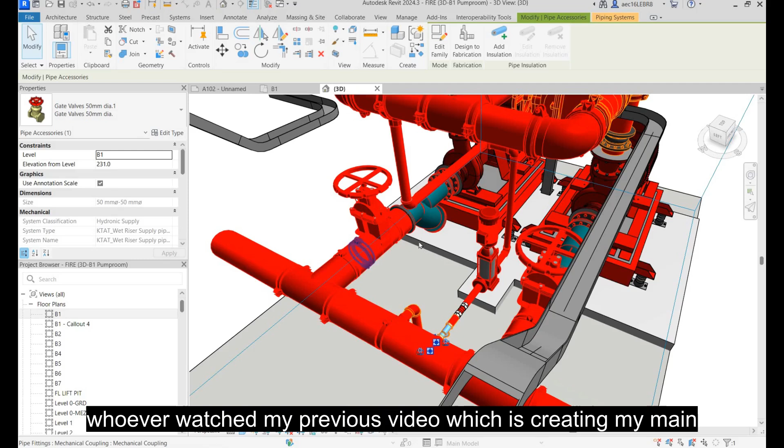So whoever watched my previous video, which is creating the main pump over here, the main sprinkler pump, might be asking what this small pump sitting here is for. What is the purpose of this small pump? Normally we call this a jockey pump.

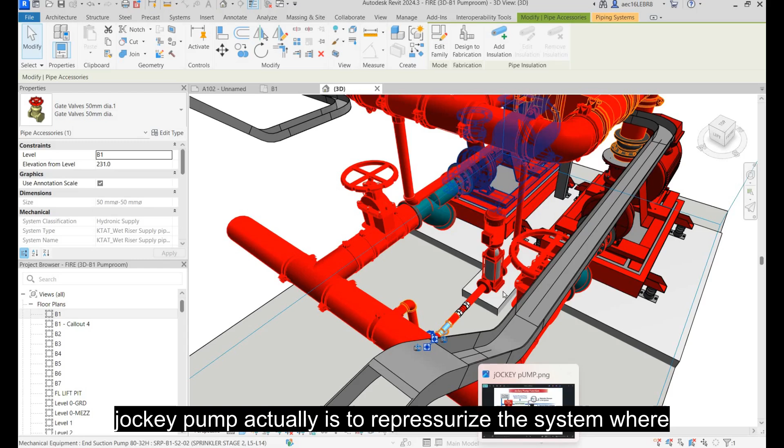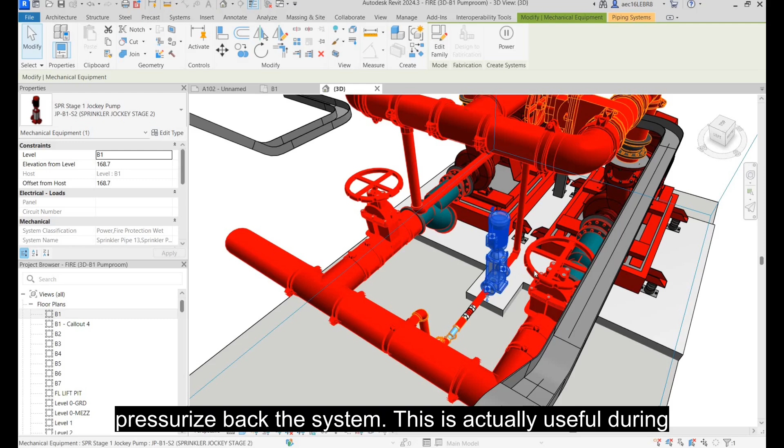The main function of the jockey pump is to repressurize the system where there's a minor leak in the system. Instead of starting the main pump, which creates high pressure in the piping system, we use this small jockey pump to pressurize the system back. This is useful during regular testing of the fire protection system, or if there's any leaking, the jockey pump will run and you will get a notification from your main fire console.

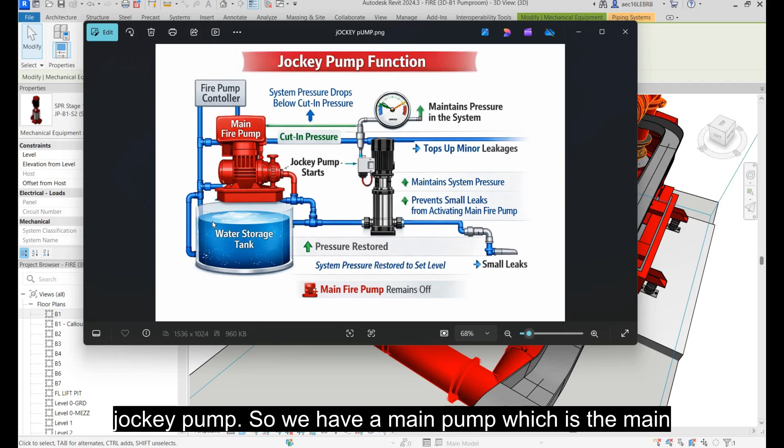This is a simple diagram to explain the function of the jockey pump. We have a main pump, which is the main pumping system of the whole fire protection system, and the jockey pump sits between the standby and duty pump over here. The purpose is to repressurize the system when there's a minor pressure drop.

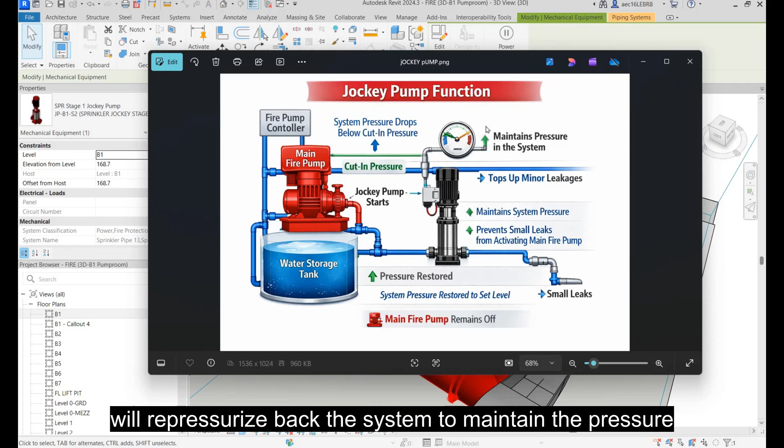In order to test this pump, normally we drain out the water from the system using the small valve here. If the system senses the pressure drop, the jockey pump will start and repressurize the system to maintain the water pressure in the sprinkler system.

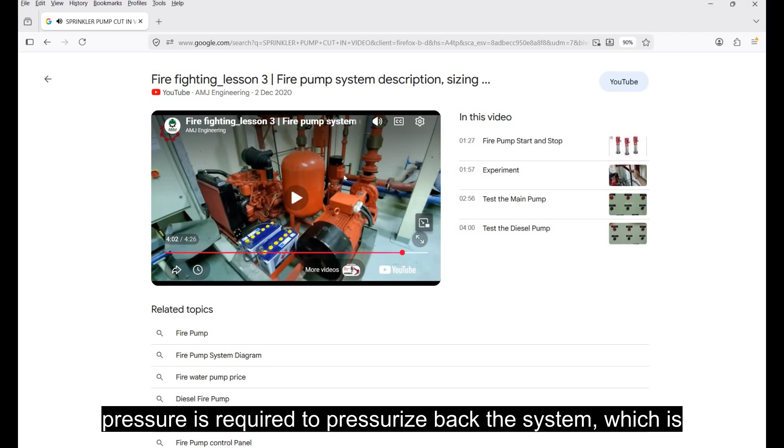So instead of a huge pressure kick, a smaller pressure is required to pressurize the system back, and this job is carried out by the small jockey pump over here. Normally we use a multi-stage pump.

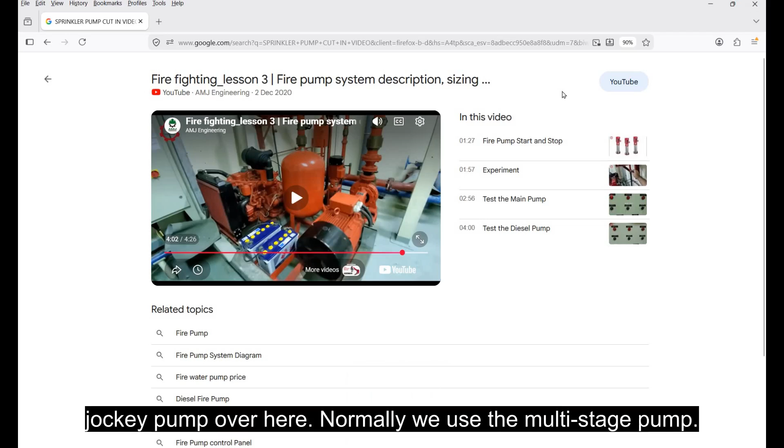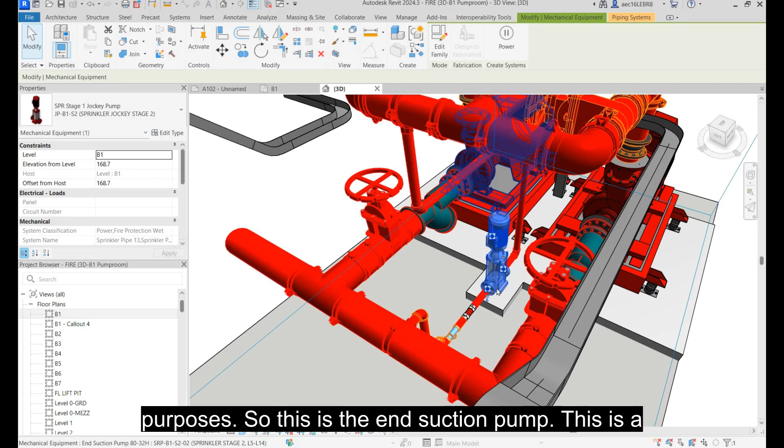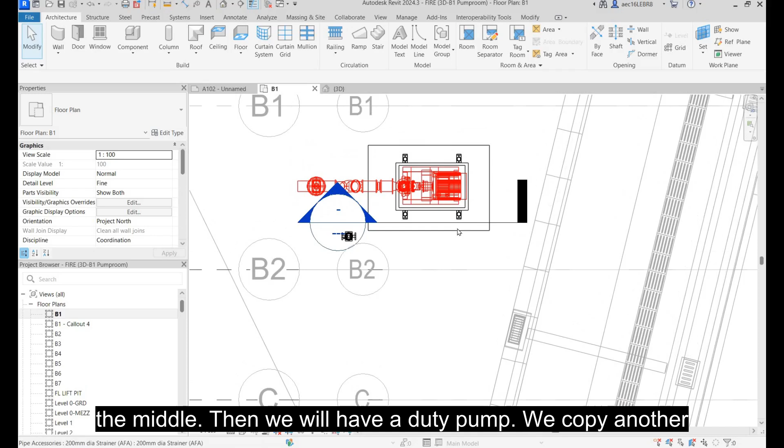Let's see how we're going to model this. We go back to basement 1 over here and place this pump here. We copy this pump since we already have it, and place it in the middle. Then we will have a duty pump, and we copy another standby pump. Talking about fire safety, we always need a duty pump and a standby pump, so in case the duty pump is not running, we still have a standby.

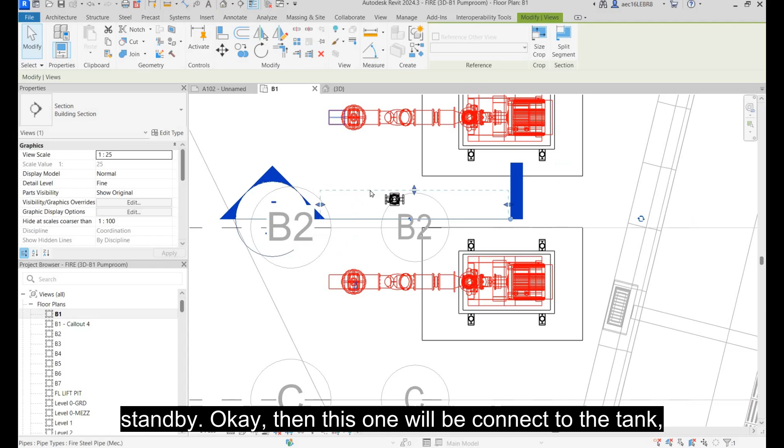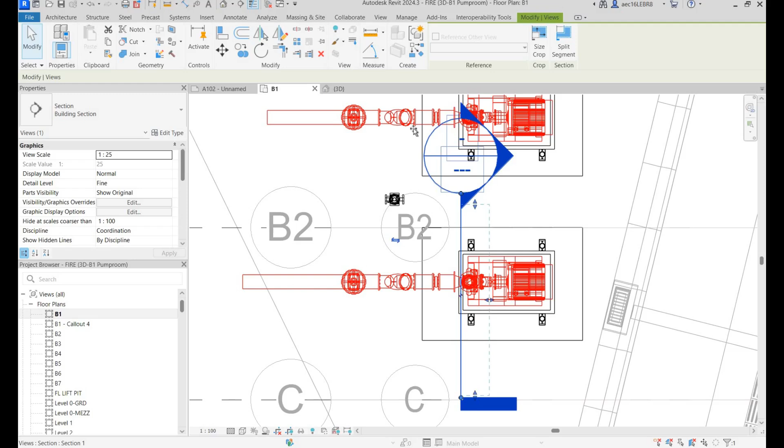Then this one will connect to the fire tank to suck the water, and this will pump out the water, outgoing at the top of the pump. So we're going to connect both ends. Go to the section over here, then go to the view. We connect these two, then we go out, outgoing connected to the place you want.

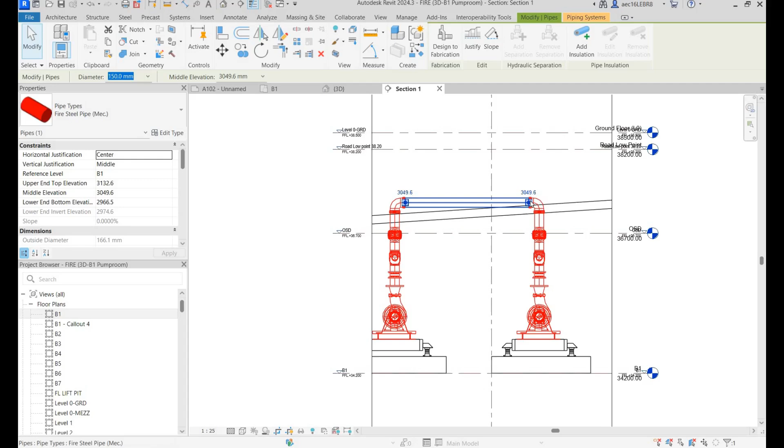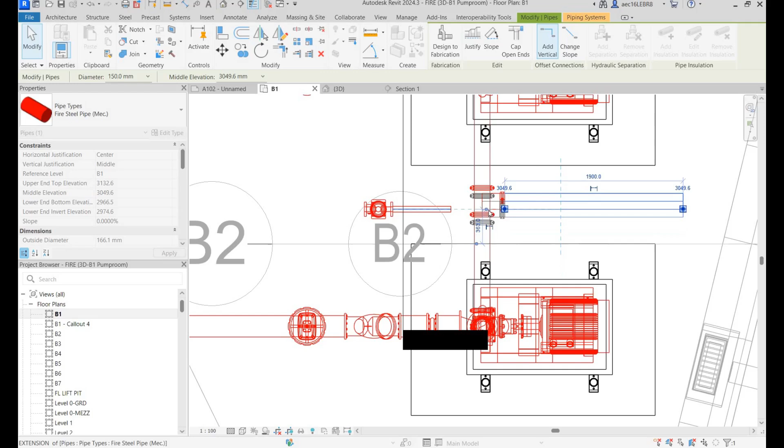Basically create similar. We don't have a tee here, so we use PF to create a tee and put it here. Then this will be 150 mm. Draw the outgoing pipe. The outgoing of the pump connects to this outgoing. We need to connect back to this pipe. So we rotate it and place it here. Suction side, we connect it first.

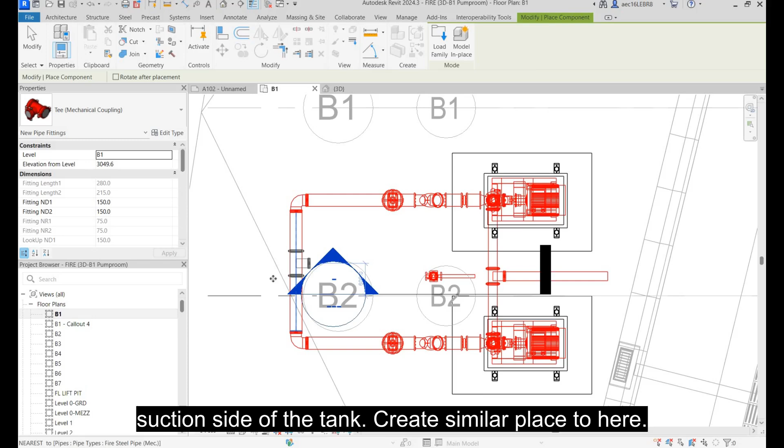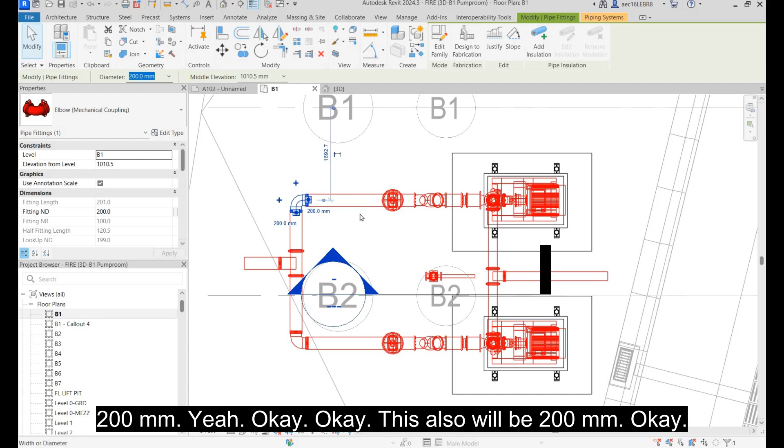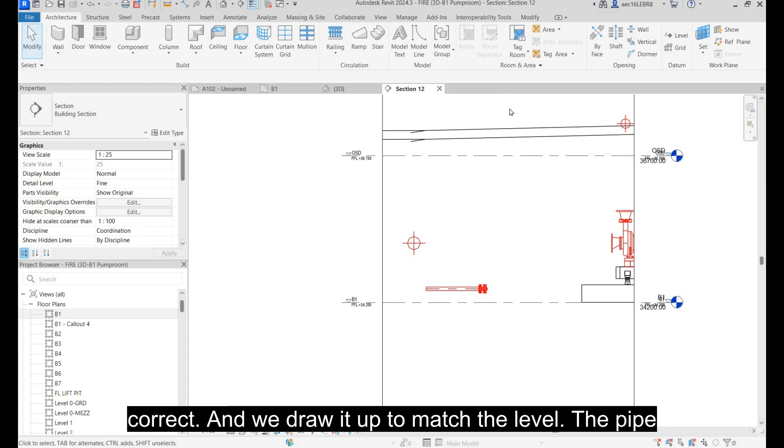Normally this one will go to the suction side of the tank. Create similar and place it here. Normally this will be one size bigger, which is 200 mm. This also will be 200 mm. Then this incoming connects to here. Let's check whether the level is correct. It's not correct, so we draw it up to match the pipe levels. That's done.

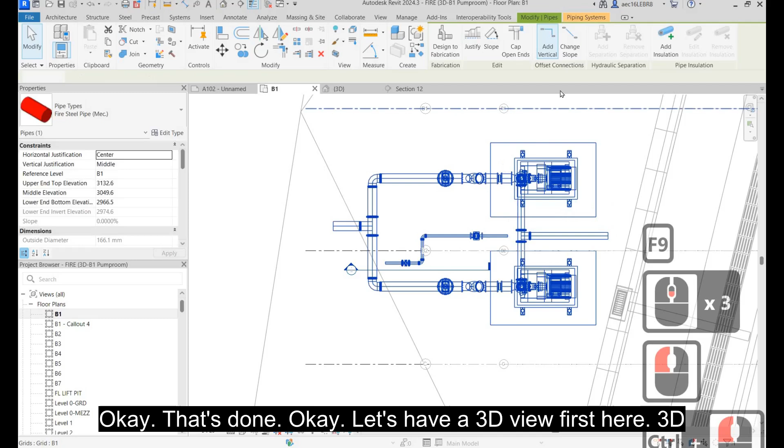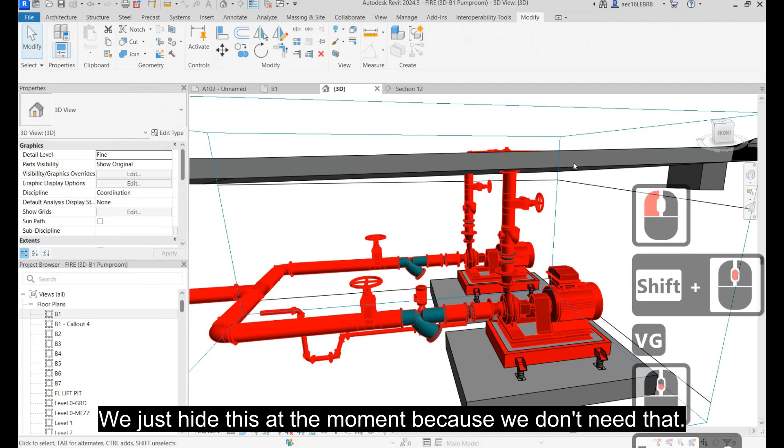Let's have a 3D view first. Z, enter. This is basically the 3D view of your pump set. Of course, it will sit on the plinth higher. This one is lower. We just hide this at the moment because we don't need it. Hide in view, element. Here we need to connect this to here and the discharge. Come back to the plan view.

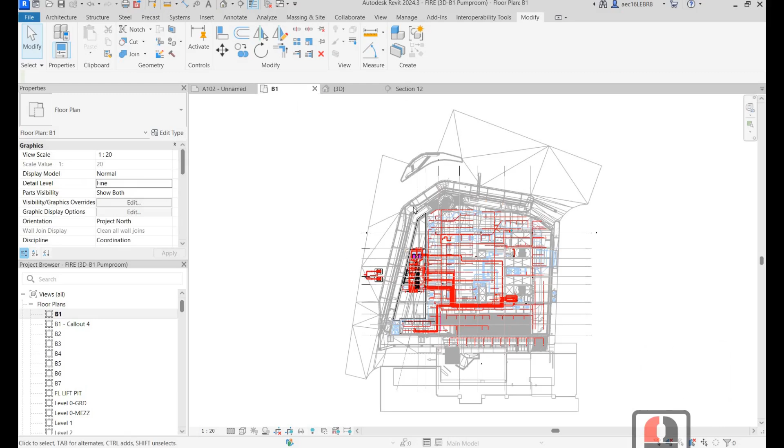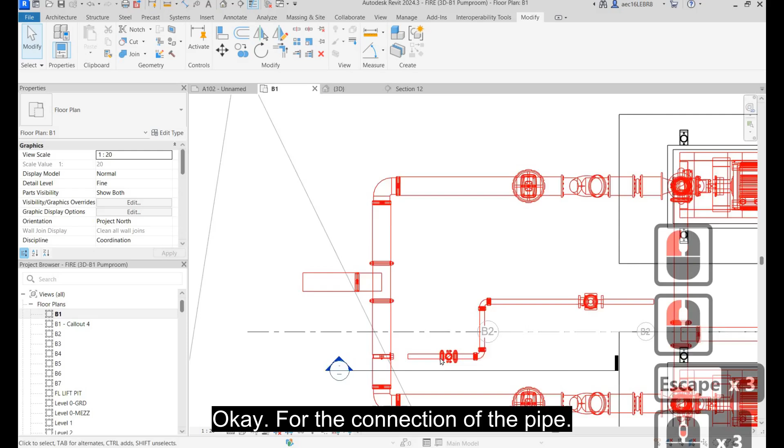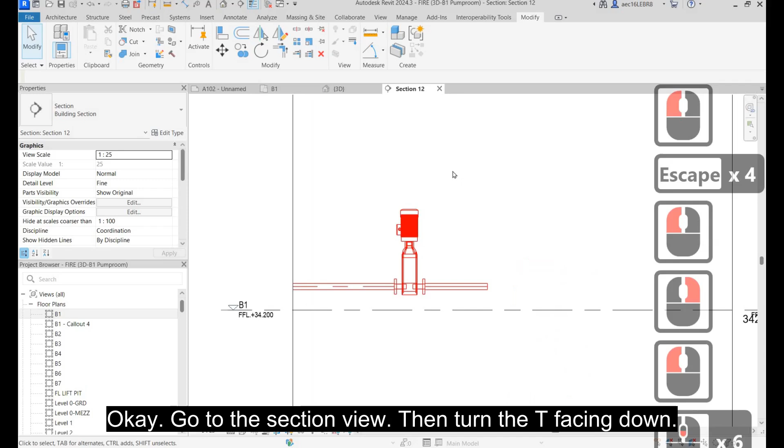PF for the pipe fittings. We need a tee, a simple mechanical tee. This one, for the connection of the pipe. Then here, another tee, PF. Go to the section view, then turn the tee facing down. Press the small arrow to turn the tee, rotate it, then this one goes up. Connected. Basically we have the in and out connected.

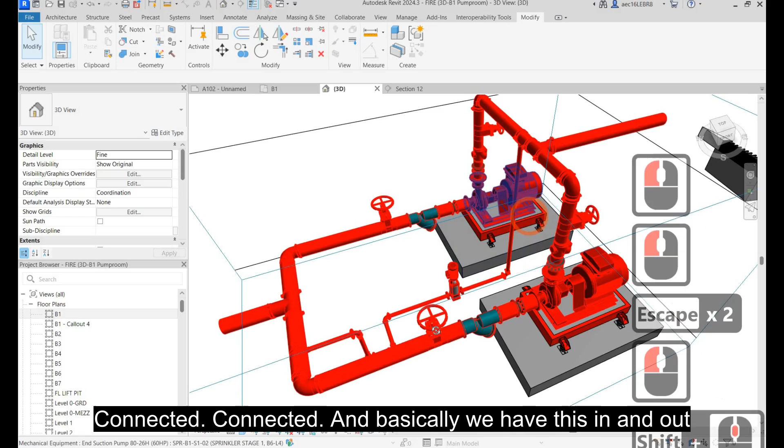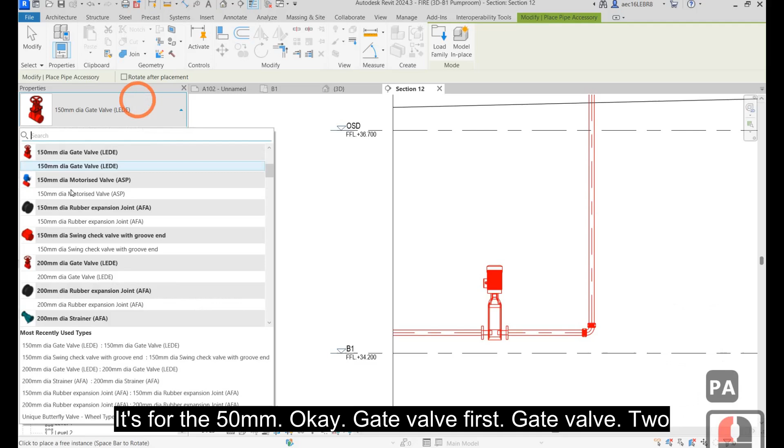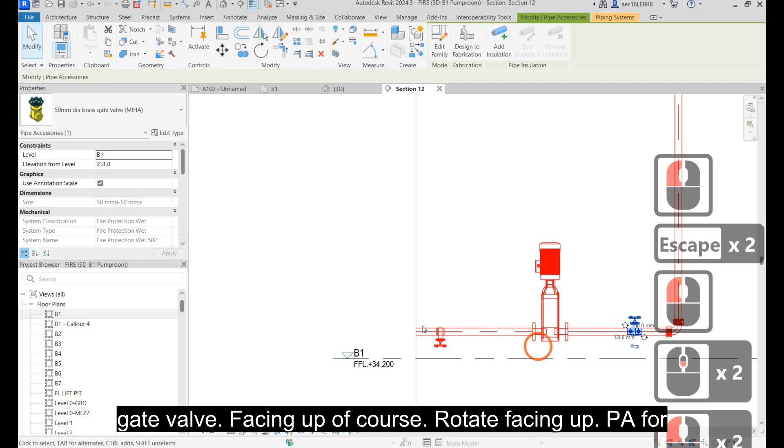Then the fittings of the pump. This pump needs the standard fittings like flexible joints, gate valve, strainer and check valve. Back to the section view over here. Since this is outgoing, we need PA for the 50 mm gate valve first, facing up of course. Rotate facing up. PA for the flexible joint, front and behind.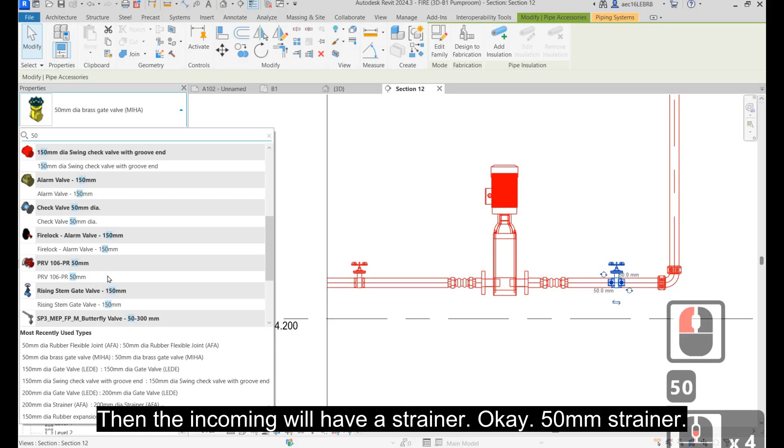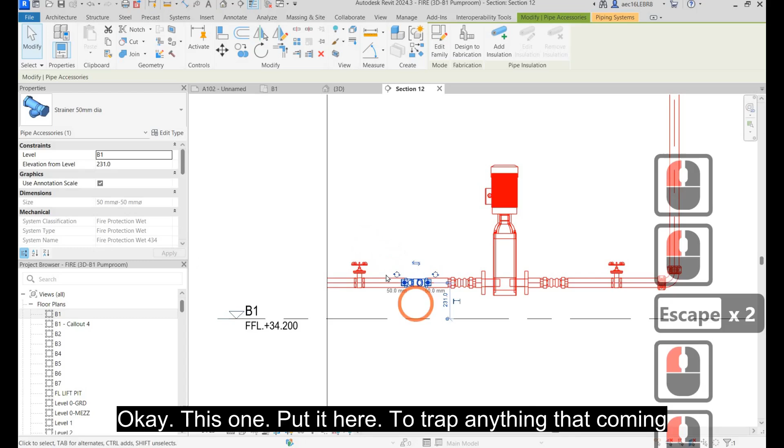Then the incoming will have a 50 mm strainer. PA, 50 mm strainer. This one, put it here to trap anything coming from the incoming. Any dust or particles will be trapped inside here instead of damaging the impeller of the pump. The next one will be the check valve. PA again, 50 mm check valve. This is the check valve.

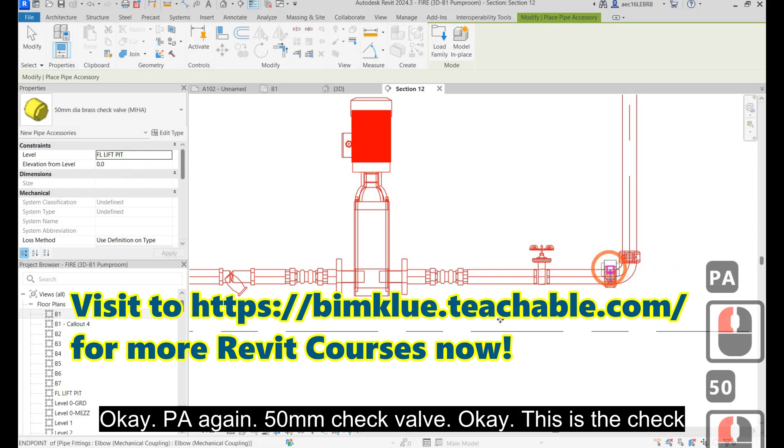So everything is done. Basically we have assembled another pump set over here, which is the jockey pump with the fittings, incoming and outgoing to the main lines. I guess that's all for this tutorial.